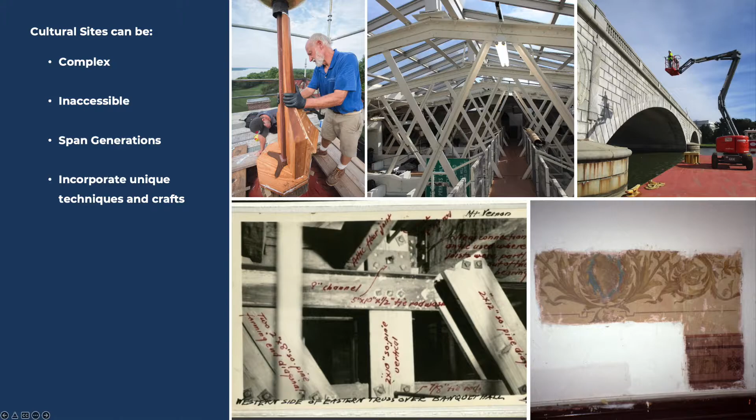If you look at the bottom right picture, you can see an image from the Michigan State Capitol. They love to describe it as having 9.5 acres of decorative paint, and they're not lying - it is a fantastically, beautifully decorated building. But through generations of change and time, a lot of those rooms that were painted very decoratively were covered up for renovations. You have to peel back layers of paint, peel back layers of history. So it's just something to keep in mind when you're working in these sites, and something that we needed to keep in mind when creating a tool that our clients could use.

So documentation, the documents themselves - they come in many, many forms. Just on this slide alone, we have on the top a scan of an original historic drawing. If you can't read it out in the audience, that's okay, we couldn't read it in front of us either.

It's often very illegible. To the right of that, you can see a picture of a CAD plan. On the CAD plan, you might notice a series of individually colored dots. Each of those dots actually represents a different nail from a different time period at the floorboards at Mount Vernon. These stretch between the 1700s, 1800s to the 1900s. It was important for them to document which nail goes where, because using that information, they can determine how old those floorboards were placed.

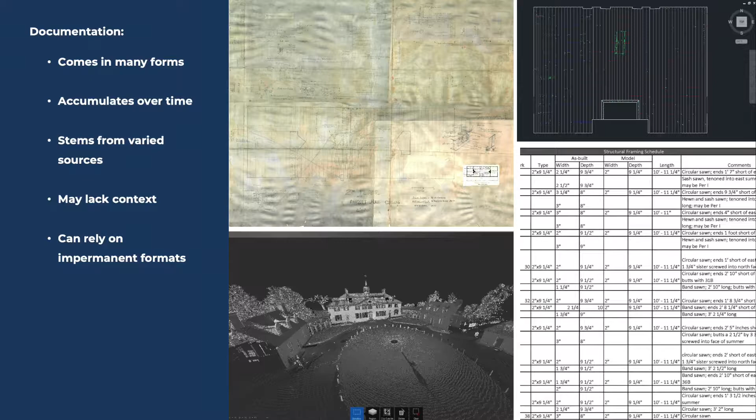Then you also have, of course, laser scan and point clouds, and also a series of reports like HSRs and cultural landscape reports. So these documents accumulate over time. They can get lost, they can get shuffled, they can be sectioned away in an archive that not everyone knows where it exists.

They come from a variety of sources. Every person is going to generate a new thing, which means that's a new point of genesis for this document. They often lack context. So sometimes you might have a really nice, let's say, section diagram, but if it doesn't really tell from what period of time in the building's significance it occurred, you might not know how reliable that information being conveyed is.

And then they can also rely on impermanent formats. This is something, as we get into more and more digital documentation, you might often find that if you go to a project that was created in a BIM platform, let's say even 20 years ago, it's often hard to get access to that digital information. The same applies to information that was in photographs or negatives or anything that has a certain limited duration of how long it can last.

This information itself, as I just mentioned, can be lost, it can be unavailable, it can be unclear, and it can be inaccurate.

One of the important things I'm going to explain in this slide is there's a picture in the center of a stringer that has a support for a duct running through it. This is at Mount Vernon, the ceiling above what they call the new room. Now it's new because at Mount Vernon, the period of significance was anything in George Washington's lifetime. So this was new because it was renovated in the 1780s? 1785, so yeah, very new, of course.

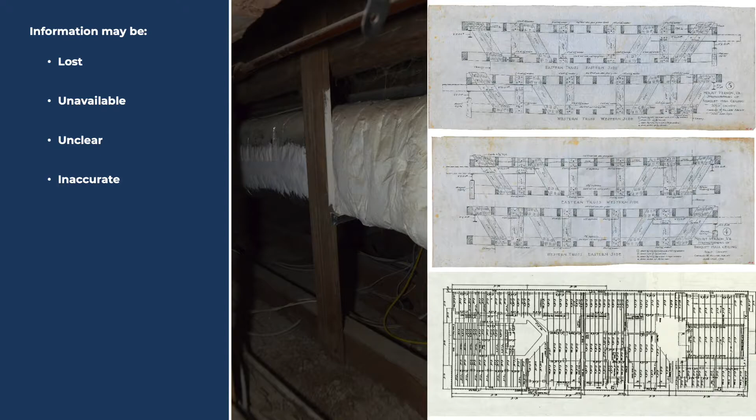Now, the HVAC contractor who's going in there to install this duct, of course didn't know that. So they thought, sure, I see a piece where I can screw in a support, let me do that, go about my business. I mean, this is a pretty significant loss of what could be a culturally significant piece of material to Mount Vernon. And it highlights a very good example of why having a document and a resource that can be used to manage this type of information, to manage this type of project, so that something very important to the client won't be lost when it's translated to everyday contractors or even people like us, architects coming in.

And so with that, I'm going to pass it off to Rob to talk about design technology.

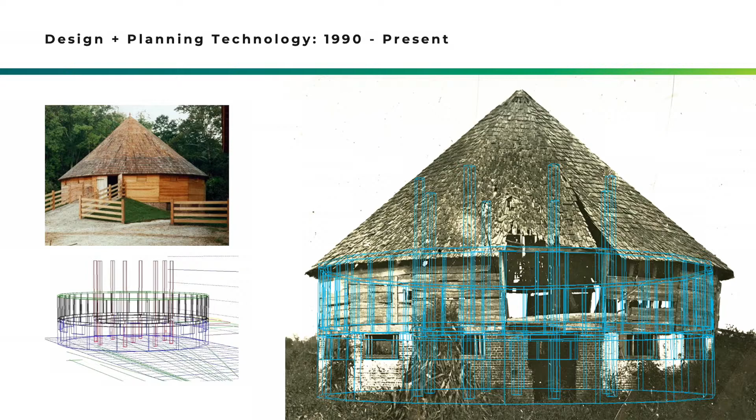So over the years, technology has changed a bit. Back in the 90s, this predates me at Quinn Evans, but we did a project where we had to reconstruct the 16-sided barn at the Mount Vernon property. And all we had was this photograph and a scantling, which is also known as a bill of materials, from George Washington's time. So we were able to take a 3D CAD, basically I think we used CADVance at the time, and overlaid it on top of the photograph to figure out the size of all the materials. So that's some of the early work we've done.

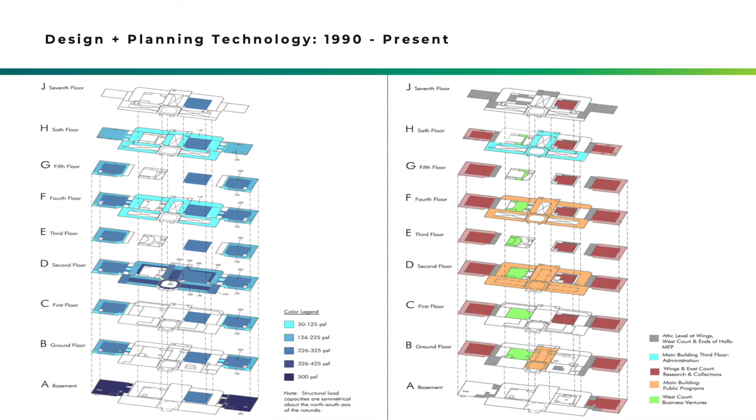Then we moved on to blocking and stacking diagrams. This was all done, again, in CAD. It's very two-dimensional. In order to make it look three-dimensional, we had to basically manipulate these in 2D space on a drawing. So there's obviously this need to move ourselves into the 3D world.

And then back in 2005, we started working in BIM and started to do things three-dimensionally all the time. This is where, as a sales pitch, we created a model of the distillery at Mount Vernon, a project that we had done shortly beforehand, and gave an example. There were some areas of the building where we didn't do things by the prescriptive code. We had a variance, and we had a life safety engineer come in and take a look and provide a statement as to why it was okay for us to do something different, and we got sign-off from the local building official. Well, that kind of a document can get lost very simply over the years.

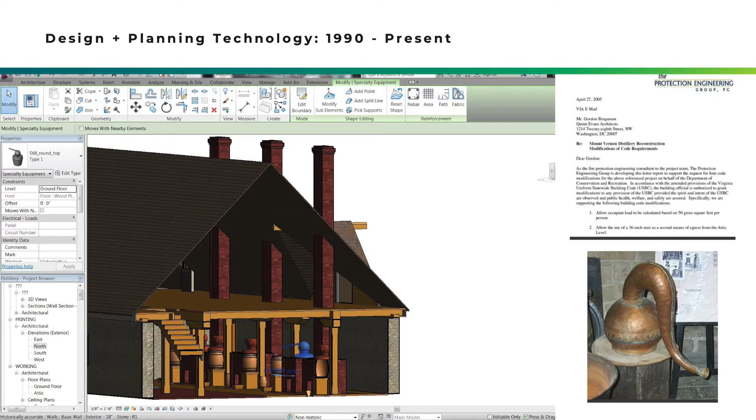So that's what you see there in the upper right. We want to be able to attach that to the building somehow. How would we do that? Through a 3D model. Also in the lower right, there's a photograph of the distillery head that's part of it. And it would be great to be able to pull up this information readily.

Okay, so now I'm going to get into the discussion about how we created the BIM. So what is HBIM? We like to think of it as a 3D filing cabinet. It's essentially, I think we're all now fairly familiar with the term digital twin. It's that same idea where we're going to recreate the building in virtual space. But the way we went about it, we have to make it so that it's useful to the owner, the person that's going to be using it. So there are different strategies about how we model things that I'll go into more detail on.

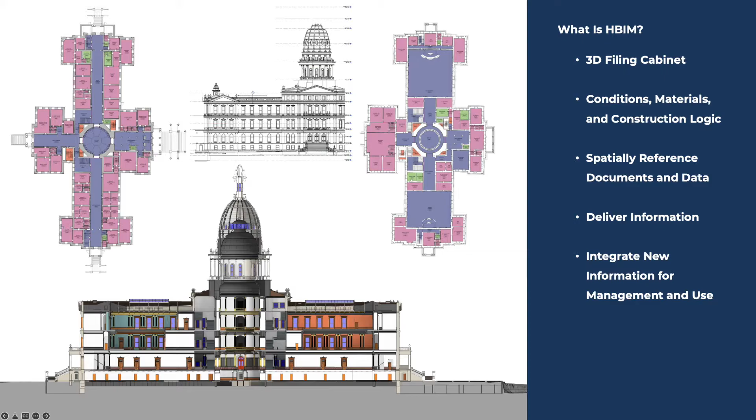It's very important to capture spatial data and be able to create these elements that can act as data buckets, we like to call them, or filing cabinets, like folders, where we can then put the information and associate it with it.

So our process: we go through collecting the data, then we organize it after we've collected it. By the way, data collection is a constant process. There's an initial push at the beginning of the project where we grab as much as we can, but as we go, we learn there are new documents and things we can use as a reference. We organize the data, then we work on the actual creation of the model.

Then we come to the part where we want to make this useful to the owner, so we integrate it with GIS, connecting it to the larger system. The building itself has a relationship to the environment around it, the site, and even beyond the site, the neighborhood and so on. Especially Washington's influence is felt around the world, so it's possible that through GIS we can connect some of this information globally.

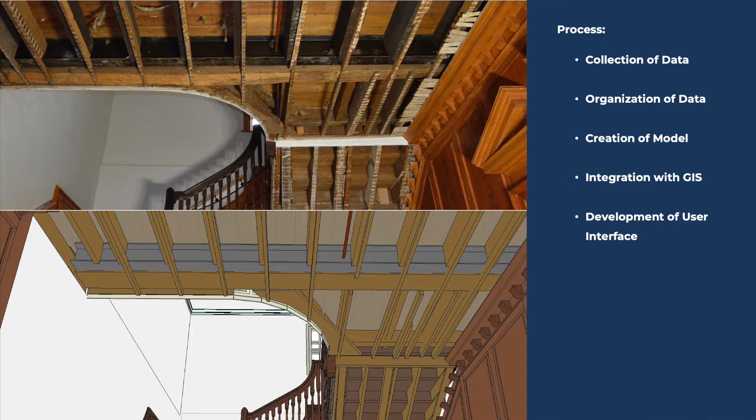And then there's the development of the user interface. The user interface is actually what makes it usable, and if we don't have that, we notice that we fall short a little bit.

So in the data collection process, as you can see here, sometimes you find yourselves in very cramped spaces. As Charles mentioned earlier, it can be really difficult to get to some of these. So we have to be very diligent and willing to accept data from all different sources, not just a point cloud. We look at historic drawings, and we even talk to the stewards of the building themselves to find out stories and other information we need to take into account.

One important thing to point out is we often forget that the building itself is an important document for how to treat it, because there's a lot you can see just with your own eyes that are evidence of either generations of change that have occurred, or generations of treatments that have been applied, which can significantly alter how the building stands at the time. So using the building itself as a resource is important.

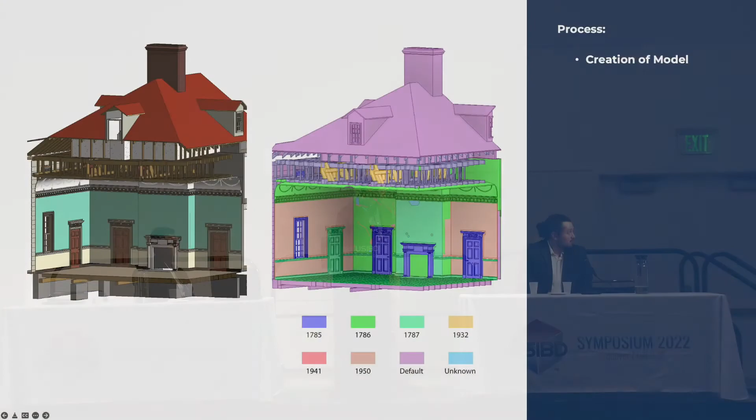But as we mentioned earlier, it's Mount Vernon—the highest precedence is anything available in George Washington's lifetime, so 1799 or prior. So even though that peach-colored 1950 plaster is technically historic, they would be much more willing to sacrifice that as opposed to the 1786 plaster right next to it.

Again, we didn't design things or build the model out like we would for a regular design project. This is an example of a stair where we deconstructed it to every little piece of wood. They wanted to be able to track them separately because if they go to replace something like a stair nosing trim, they want to know that it's not original to the building anymore.

The handrail you see there, for example, is actually original to the building. It's the very same handrail that George Washington would hold onto when he went upstairs or downstairs. That's fairly significant to them—they want to know that all that assembly is original.

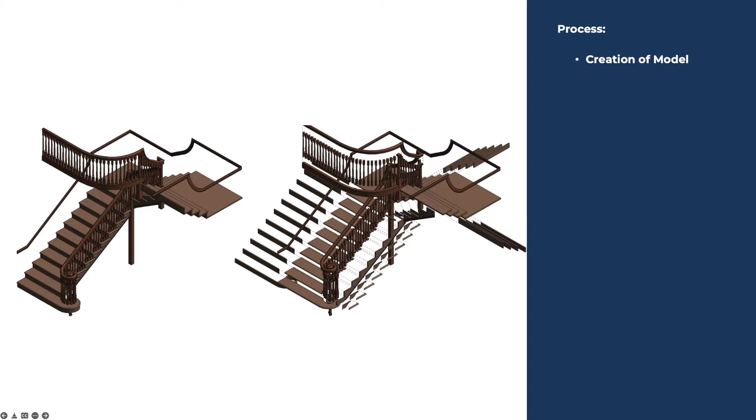As it turned out, while we were doing this project, they discovered that the very last spindle baluster in that handrail was actually missing completely. So they were able to replace it, and then we were able to identify it as a modern intervention to the historic fabric.

Okay, I'm going to hand this over now to Charles, and he's going to talk about the integration of GIS.

Thanks, Rob. So the model authoring software that we used for this, as we've already explained, is Revit. And Revit's a really powerful program, and it was really great to use if you know how to use it. If you don't, there's a fairly significant barrier to entry.

And so our clients, and a lot of other people we wouldn't expect to be using Revit, would need it as the sole source to access all of this information, because it would take not only a large monetary investment to get all the software, it would take a large amount of time to invest with people to learn how to use it properly, especially in the way, as Rob mentioned, we're not using it the way you would for normal construction.

This is a very specialized use of it. Because of that, we wanted to make sure we took this model and all the information embedded within it outside into another resource that is more accessible. Going back to that first line, access to and use of, they need to be able to actually access this information.

At this point in time, the best method we could discover was actually bringing the Revit model into GIS, because in GIS we can bring it into the global context and also start integrating outside databases that organizations within Mount Vernon use, like collections, site, and archaeology. All these relative departments have their own independent databases where they collect information, so we could tie that back into elements we tagged with a unique mark ID in the model.

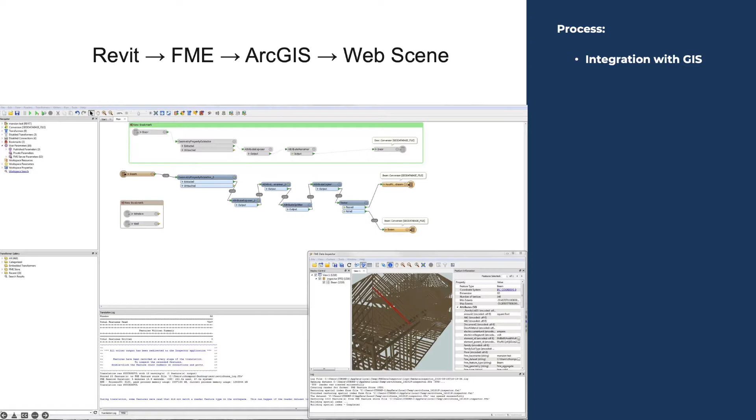What's important is that within ArcGIS, we can export it out to a web scene. What you see here is a prototype we developed, and to be completely honest, this is still relatively where we are to date in this process, because we can bring all the information here, but the real integration of separate databases into the GIS web scene is proving quite difficult, because it exists beyond the skills typically found in the AEC community.

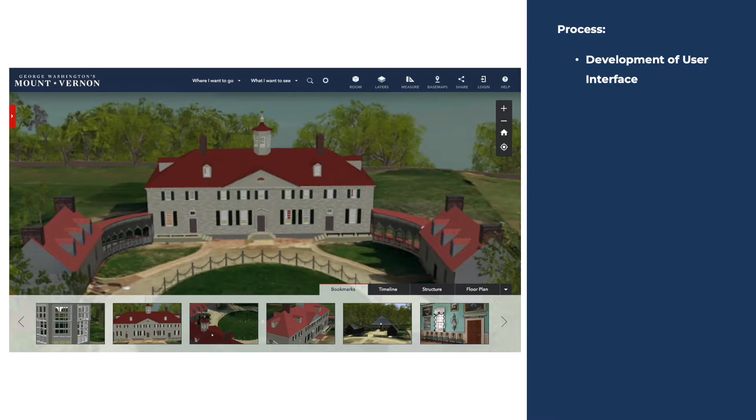So we have this web scene that was developed, and the premise was that you could have a web browser where your client could log in from anywhere in the world, using any computer, without having to access Revit, Esri, or any unique software. They can go through and start to filter what they want to see.

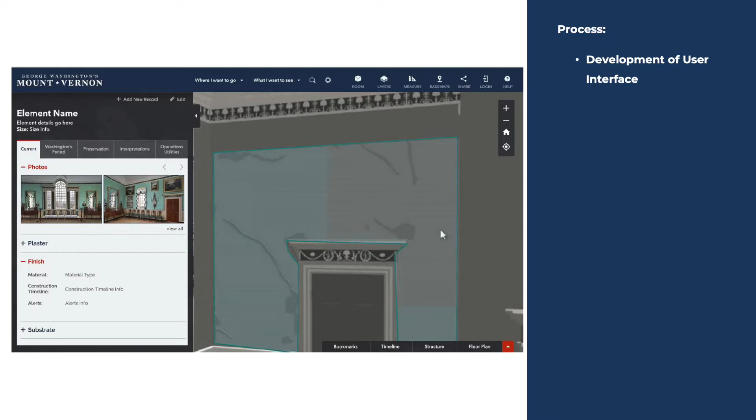We have the example we showed earlier with the creation of the model, the different dates of installation for the plaster. Well, now that's translated onto a resource you can find online, and with that you can start associating photographs, and associating where in the archives they might have the document referencing where this plaster was created, where that document resides.

Using that, we wanted to make sure all the effort we put into developing the model was also used as a management system, because I think we skipped over this a little bit. When we talk about HBIM, a lot of people think it stands for Historic Building Information Model, and we always talk about the model, showing examples because they're really cool, but what it really is, as we think about it, is Historic Building Information Management. It goes beyond just the modeling process, it's about how you take this resource and integrate it with other things the client needs.

That kind of wraps up the process of creating the HBIM to date. So we're going to talk about some lessons learned, things we've learned along the way, what has changed as we've been doing this, and then we'll free up time for questions or discussion afterward. With that, I'll hand it back to Rob to go over the first lesson.

Nomenclature is ridiculously important, is what we discovered during this whole process. How you call something becomes really important.

For example, when we were working on the Michigan State Capitol, we kept referring to the bottommost level of the building as the sub-basement. Well, the scanning company we hired at the time kept referring to it as the crawl space. So we kept getting confused, thinking, wait, there's a crawl space? What about, but you didn't do the sub-basement? For a couple weeks there we went back and forth, and they almost went out to do more scanning before we realized, no, actually we're talking about the same space. So it's really important that everybody gets on board with how we name something.

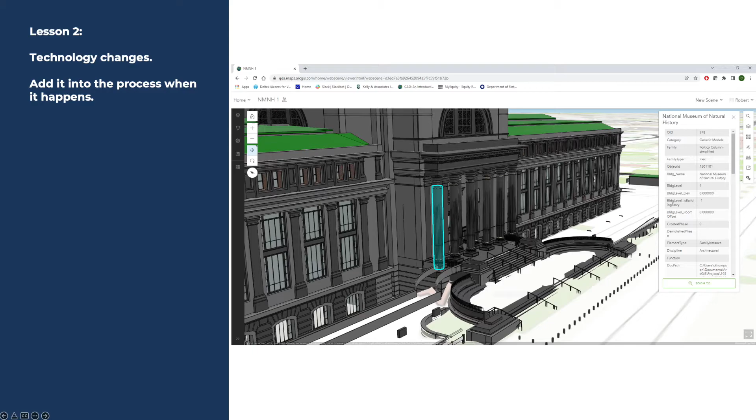So actually, this is one of my favorite parts of this presentation, because this slide, and the slide I talked about that was very similar to this previously, is completely irrelevant now. This existed when Autodesk and Esri were still siloed within their own respective kingdoms and did not have interoperability between the two of them. That has since changed since we started this process.

Now you can actually bring native Revit files into ArcGIS and start reading it. So this brings up the important lesson number two: technology changes. Maybe things haven't felt like they've changed a lot in the past two years, but they've changed since we started this process. And so it's important to incorporate this into the process.

Understand that just because you came up with a good idea at the time doesn't make it the best idea currently. There's always renovating, always innovation, going back to how you can document and how you can associate information together. So now I don't actually have to go through the FME program to bring it in. But that doesn't mean I don't need to take lessons from what Rob just mentioned—nomenclature—because that mark ID is still extremely relevant, just as relevant now as it was earlier. It's just that now I don't have to use it as the primary way of converting the IFC geometry.

Another example of technology to integrate: in the Michigan State Capitol, about halfway to three-quarters through the project, one of the project managers mentioned the idea of orthophotography and photogrammetry. Because they have 9.5 acres of decorative paint, they wanted to capture some of that in this model form. If we're already going through the process of creating this digital database, why shouldn't photographs be incorporated into it? So that's what we see here.

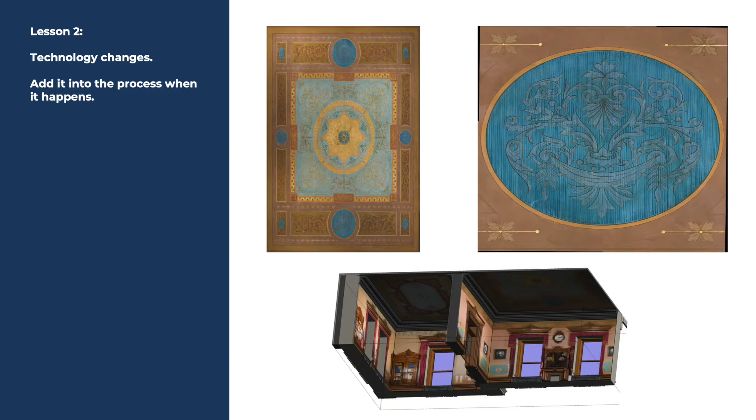Lesson number three that we learned: we're figuring out—I'm not sure if people are familiar with the Secretary of the Interior standards for the treatment of historic properties, but that basically lays out a series of rules on how you want to treat areas within a historic property designated with a certain importance. That includes restoration, adaptive reuse, authentic restoration, conservation, and rehabilitation. These are the terms that the Michigan State Capitol was using.

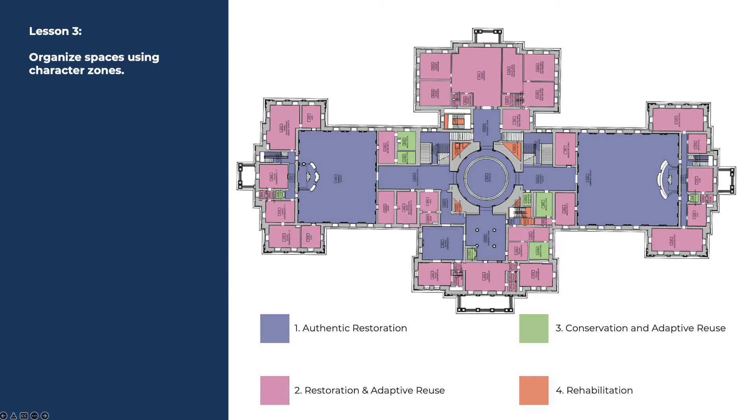What we've shown in this plan is a color coordination for anything that exists within that scheme. The purple and pink areas, 1 and 2, are of highest priority for them—things that capture the historic nature, where any changes still reflect that nature. Rooms or spaces found in areas 3 or 4 are usually more utilitarian, more operational spaces, where it doesn't actually matter if you save the plaster on that wall, because honestly it's about to get blown out when facilities managers come in for the next project.

If you remember the color scheme here, you can see how that translated into the model we created. This model has LODs from 100 up to about 350. Anything on that lower level—the basement, sub-basement, crawl space—as Rob mentioned, is in orange. That wasn't as big a priority for the Michigan State Capitol because that space changes a lot; there's a lot of equipment moving through there, and the floors and walls get ripped up.

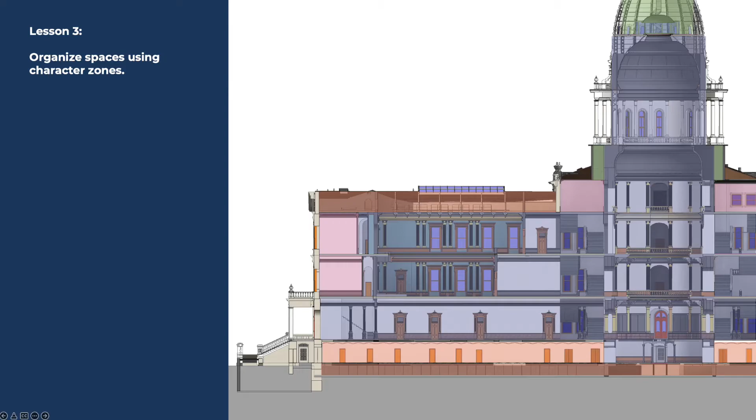But if you go above that, we start to see the bluer spaces, such as the Senate and House chambers, where we actually went through the process of detailing the capitals on top of the pilasters, the actual wainscoting, each chair rail, base rail—everything is an individual model element so they can track it. So keep in mind that you don't have to apply the same treatment with a broad brush, even within one facility.

With that, there's a lesson number four that I don't think made it to the slide deck, but Rob can bring it up. Basically, you have to learn to navigate bureaucracy within organizations.

We're all familiar with that, but it's become particularly true on these projects because everybody has their own database within an organization, and they're very protective of it. The reason they have their own is because they don't trust anybody else to manage it. So when you come in and say, 'we've got this great system that's going to connect your database to everyone else's database, so you have one single place to get your information,' people start to circle the wagons, and it becomes very difficult to get buy-in. So it's really important that you have a champion with some influence on your clients.

And I'll also add a couple more lessons learned.

Relationships with software vendors was really key here because we were trying to really push what the software was intended to do. We were kind of making it up as we went along. We did some research early on. We didn't find any examples of anybody doing anything like this, with one exception: a grad student at an Italian university who talked about HBIM for cataloging, I think it was masonry, in a stone wall.